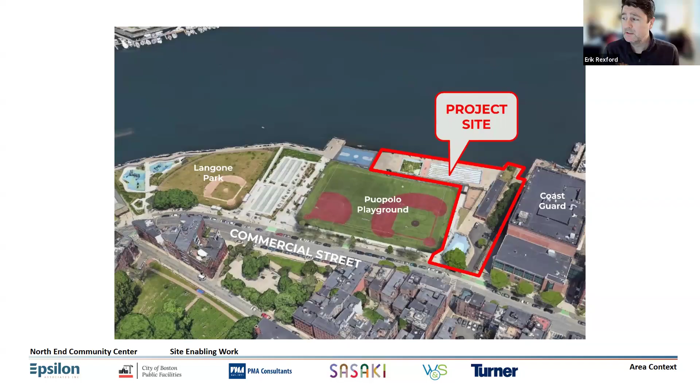But tonight, I want to go on with the limited scope of enabling work that was described in the notice of intent and has been modified by the supplemental information. Dee Dee, if you can jump to the next slide, that'd be helpful.

As described in the notice of intent, we're proposing a limited scope of work that includes demolition of the existing surface and subsurface structures—the pool, bathhouse, splash pad, and deck—cutting and capping of utilities, and geostructural improvements.

The initial notice of intent contemplated, as you mentioned, Chair Parker, elevating the seawall. We are no longer proposing to do that as part of this enabling work. That will be the subject of a separate notice of intent covering the full redevelopment project, including the North End Community Center, Harbor Walk, and the new pools, and so forth. For now, we're just seeking an order of conditions authorizing the demolition activities, cutting and capping utilities, and the geostructural improvements that I'll talk about in a couple of slides.

You can jump to the next slide, please. You mentioned resource areas at the top. All the resource areas and impacts are the same as described in the notice of intent, with one exception—land subject to tidal action.

I have a couple slides on this later, but we're proposing to install some H piles in land subject to tidal action. Those were not described initially in the notice of intent, but are described in the supplemental information submitted earlier this week. So the resource areas are coastal bank, buffer zone, waterfront area, land subject to coastal storm flowage, and land subject to tidal action.

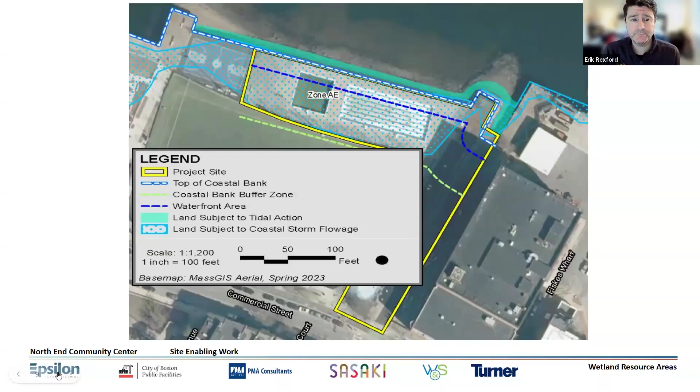Next slide, please. In addition to the demolition work and the utilities, there's a couple of buckets of geostructural work that will be conducted within the green shaded area. We did describe this all at the last hearing, by the way.

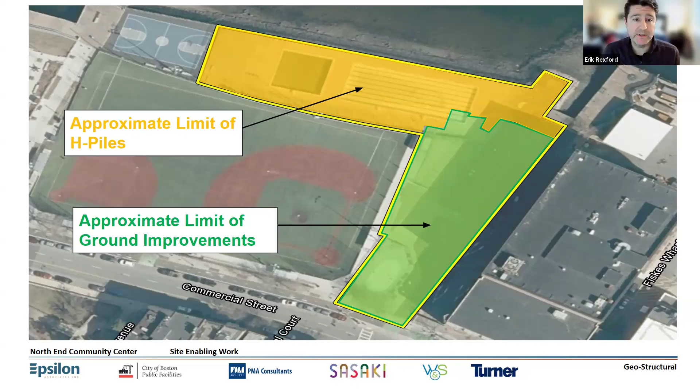Within the green shaded area, we're proposing to advance displacement columns. Those will support the vertical development under the additional notice of intent later this spring. Then there's the installation of a network of H piles that will support the pools, the future pools, pool deck, splash pad, and other structures within the yellow shaded area. Next slide, please.

This is a representative cut from the sheets included in the supplemental information showing the location of H piles at the northeast corner of the site. I selected this area because I want to call out the 16 piles at the bottom right of the site. This location is currently a wooden pile supported deck. As part of the demolition activities, that deck will be removed. Under the separate notice of intent, it will be replaced in the exact same location with a concrete deck. To support that concrete deck, we need these H piles.

We're proposing 16 H piles outboard of the top of Coastal Bank. This area underneath the deck is a granite block revetment, and we're proposing to install 12 H piles in land subject to tidal action. Four of those H piles will be installed above mean high water through the revetment and into Coastal Bank.

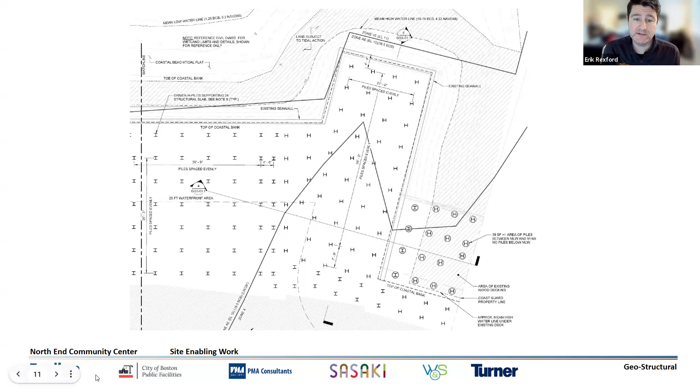Next slide, please—I think it's just a section of that same area. Yep, the three vertical piles on the right are representative of those 12 piles that will be installed in land subject to tidal action. The middle pile through the revetment is above mean high water and will go into coastal bank.

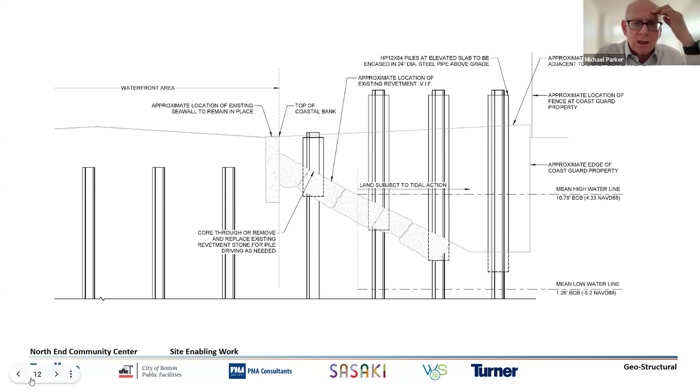Next slide, please. Just to clarify, you're proposing that work as part of the geostructural work? Correct.

There's a whole network of H piles that will be installed, most of them upland of the coastal bank. In this one location, where there's currently a wooden pile supported deck, we're proposing to install 16 piles through the revetment, but not yet install the concrete decking. That'll happen when the site is redeveloped, but we'd like to install these H piles now.

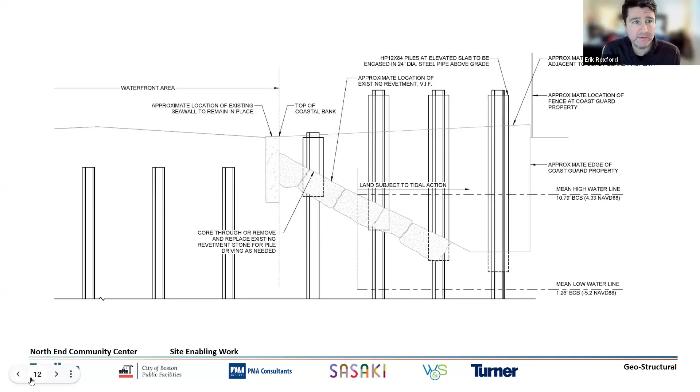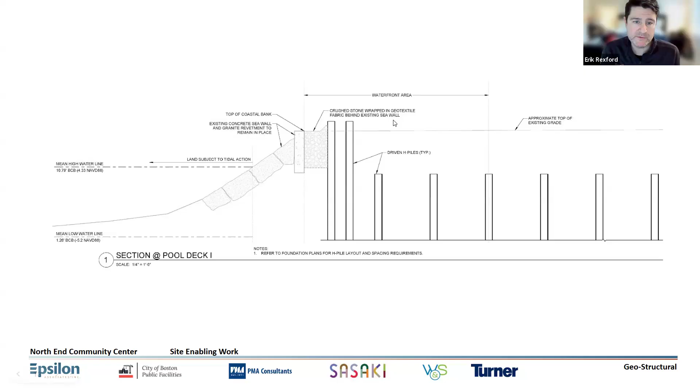Next slide is just through where the pool decks will be and are. Again, the seawall will not be touched—we're not proposing to elevate or alter that at this time. The pool forms will be demolished from the site, and that grid of H piles will be installed, all upland inboard of the coastal bank.

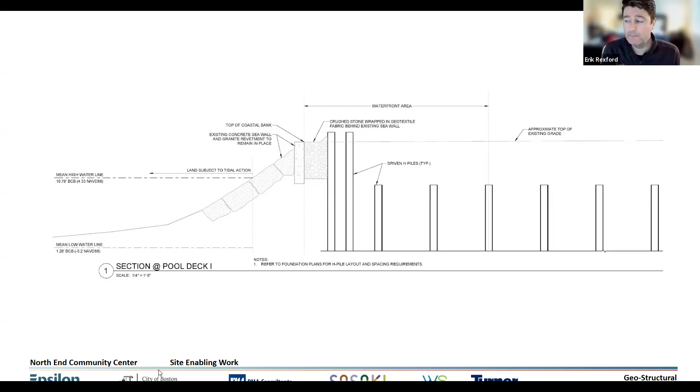Otherwise, all the work, resource area impacts, mitigation, and means and methodology as described in the notice of intent remain the same. With that, I'll turn it back over to the commission. Happy to answer any questions.

I have two questions. One, regarding the H piles shown a couple slides ago—what will they be supporting? You said concrete deck. Are they supporting the proposed harbor walk there, or what's their function going to be?

Yeah, so that concrete deck—maybe Steve Angler can help me—it'll be publicly accessible open space. There's also a splash pad that's going to be constructed back there, and I believe some of that splash pad creeps over the deck, but very little area. It's mostly just open space, publicly accessible.

I just want to make sure this isn't work subject to MEPA review that could change in the future, and that we're not jumping the gun here. It's certainly included in the project being reviewed by MEPA, but I have no expectation there'd be any alteration to that component, similar to the demolition of the bathhouse and the cutting and capping.

As far as the displacement columns—I might have forgotten this from last time—what's the process there? Is it like compressing soil and then putting in some sort of mixture to strengthen or solidify the ground? Is that how this is working?

I'm going to defer to the much smarter people on the team to answer that question. That's exactly my understanding, but Steve—I think Brett is on, and he's probably the best person to answer that question if you're available, Brett.

Great, thank you. So yes, we're back after the March hearing. I will give an overview of the project, but I won't go into as much detail as previously as to the purpose and intent. So if we go to the next slide - this parking lot project, the intent is really to create a resilient and more green parking lot that has safer bike routes and pedestrian routes and more efficient vehicle routing as well as wayfinding. And this is really the first implementable project coming out of the DCR Herter Park master plan project.

So the existing site, this is some context, but essentially we are within the resource areas related to the Charles River. To the left of us is the Artesani Playground and Splash Pad, and to the right is the moat, which also has existing wetland systems and resource areas associated with it.

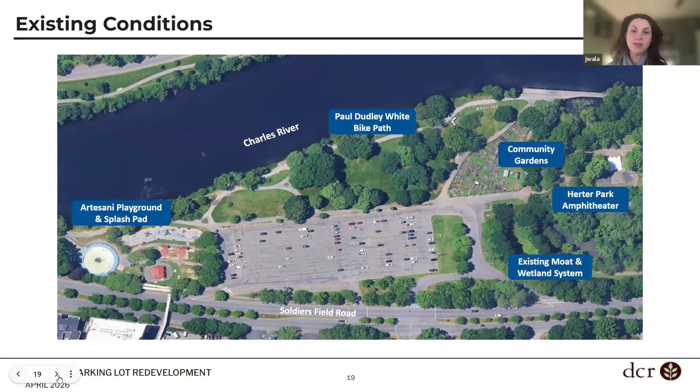We are looking at degraded pavement conditions and poor drainage due to an old drainage system. There are also accessibility issues, and as you can see with the aerial, no greenery within the bounds of the parking lot.

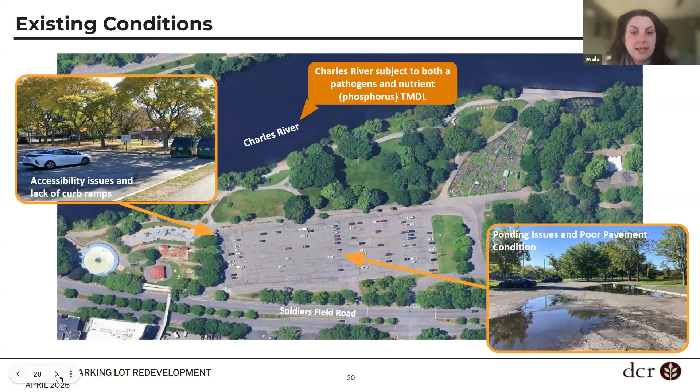We are proposing a new layout for the parking lot with new improved circulation that ties in and is coordinated with the Soldiers Field Road and Everett Street project. There's a lot more green space introduced, and we are also introducing bioretention basins and permeable pavers to treat stormwater for TSS and phosphorus. This project results in an overall decrease in impervious area as well.

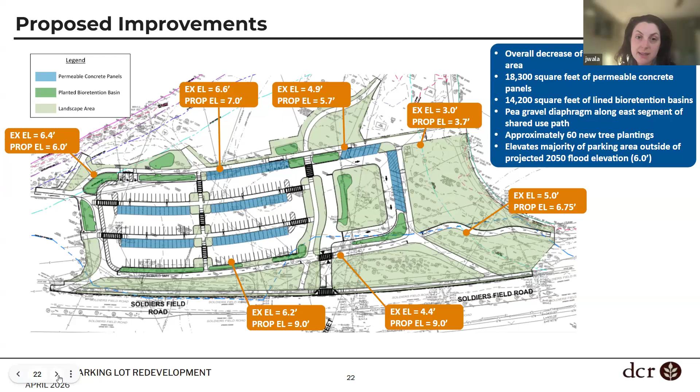We are raising the site as much as we can, given constraints with existing grades and surrounding properties in the community garden. Our goal was to set ourselves above elevation 5 to 6 based off of the MCFRM flood data. You can see we're hitting that 5 to 6 elevation or higher through the majority of the parking lot, but as we move towards the community garden, we become constrained by existing conditions. So we are raising the parking lot where we can for resilience purposes and to reduce flooding on the site.

This is a summary of the work we're doing in the resource areas. Looking at the 100-foot buffer to the bank, we are slightly increasing impervious area in this case, but all of that is proposed walkways, and the overall project has a reduction in impervious area and a reduction in peak runoff rates and volumes as a result.

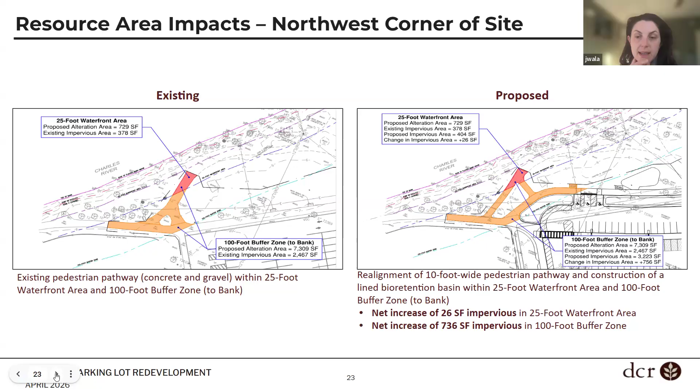Similarly, in the floodplain adjacent to the moat system, we are eliminating a paved walkway and replacing it with a permeable material. So here there's a reduction in the 100-foot buffer and the floodplain.

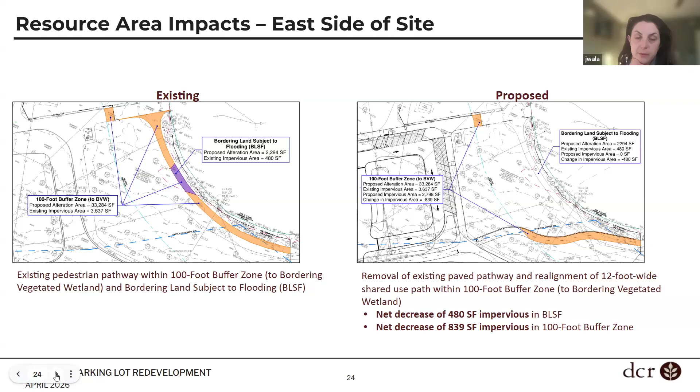At the last hearing, we discussed phosphorus removal and TSS calculations. We've been working with John Sullivan since to make sure we're all on the same page with the credit we're claiming for TSS and phosphorus reduction, and essentially the storage volumes provided by each BMP. This addresses all the Mass DEP stormwater standards, which we're meeting as a redevelopment and exceeding.

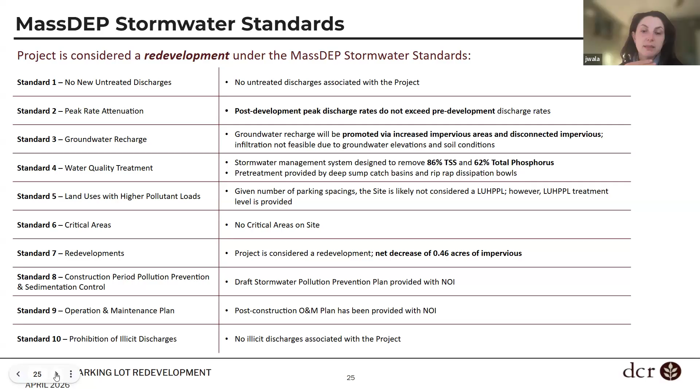This is backup that I've been providing to John Sullivan. I don't know if we want to get into the weeds on these, but essentially it shows the storage depth provided by each BMP and the phosphorus removal as a result.

Same with sediment removal, we're exceeding the 80% requirement.

I think a main discussion point from the last hearing is the maintenance of these systems. We had discussed manufacturer recommendations for the concrete panels, with vacuuming and sweeping happening 2 times a year. Since the last hearing, we went in and updated the operation and maintenance plan to include project-specific order of conditions that relate to the maintenance of the site.

So what we're seeing here highlights some important points regarding snow removal and any use of fertilizer, salt, and sand.

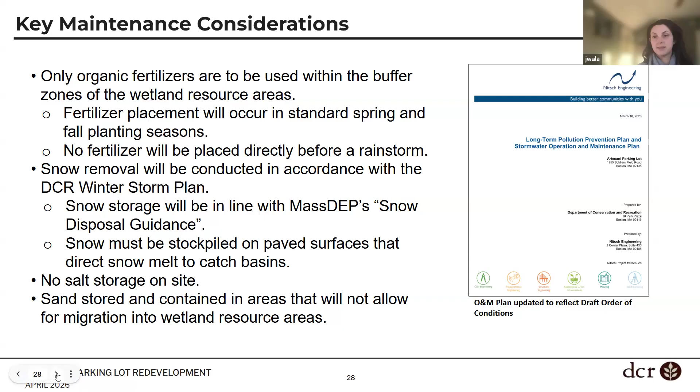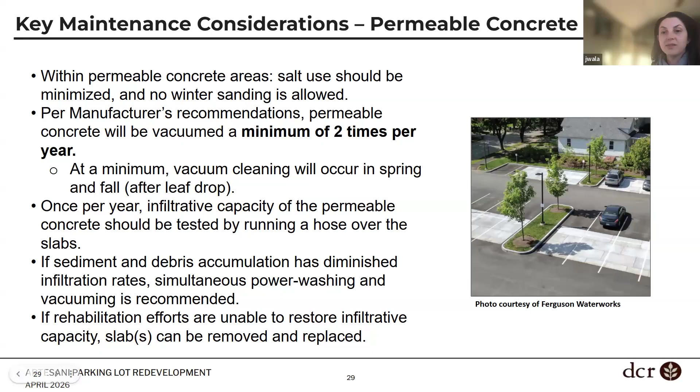If we go to the next slide, we're also distinguishing the maintenance schedule, talking about a minimum of 2 times a year coming in to vacuum the permeable concrete, and checking that the permeability is still effective at least once a year with infiltrative capacity testing. As we discussed last time, one of the benefits of these panels is that if there is a failure, they are modular and single ones can be removed.

Just to clarify, both of those slides, all of the measures in both of those slides are included in the O&M? Yes. Okay, thank you.

And with the bioretention basin, we had some questions on this one last time as well. But really, a majority of the maintenance happens at grade, and as needed, you'll start to need to replace the subgrade. But really coming in, treating the vegetation, removing essentially dead plants, replacing the mulch, just keeping the plants in good order and removing trash as it accumulates.

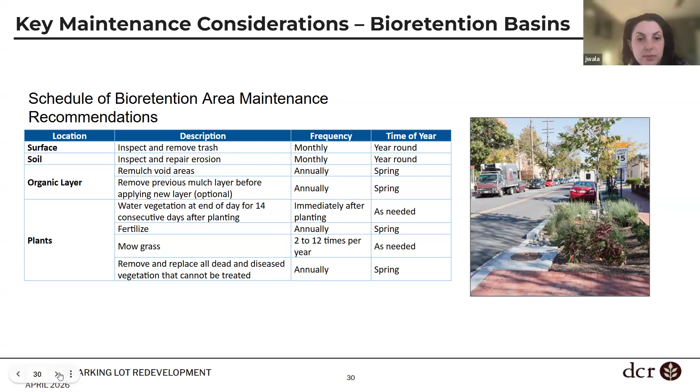I just have a couple quick ones here. Elena, this is actually for Elena. As far as the manufacturer's recommendations for maintenance of the panels, do we have that in the order of conditions? No, we don't have that, so that would be a good thing to add. Okay, so we'll need that submitted, and the revised O&M plan.

As far as one of your slides, Jess, talked about when debris accumulation affects infiltration values. How should I ask this question? I mean, when will you know that, or DCR know that a certain level of debris accumulation has occurred, or the debris accumulation won't occur because it's going to be maintained twice annually? I hope I asked that question in a way that made sense.

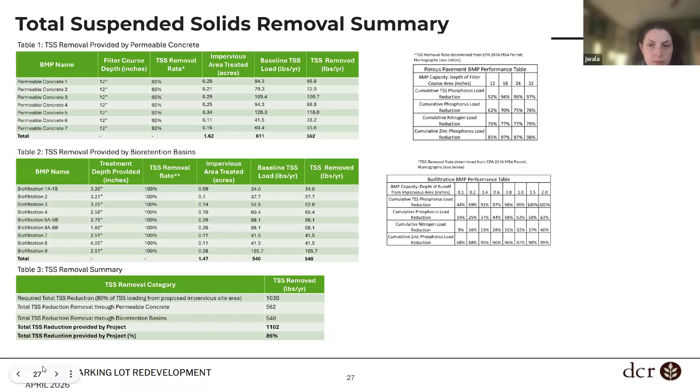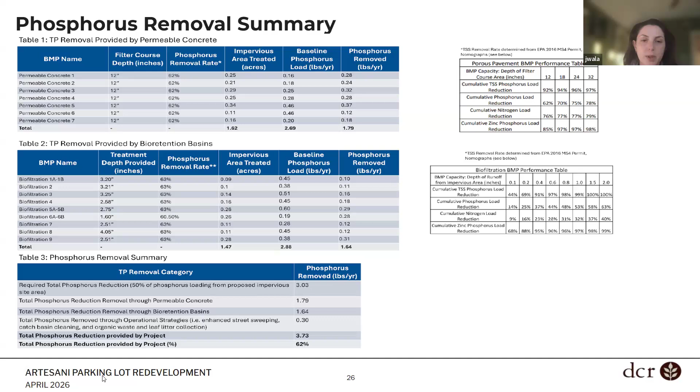If we go to slide 26. So the way this is calculated, this is a summary sheet we made for coordination with John Sullivan and for this presentation. We have more detailed calculations in the stormwater report, which may be what you're looking at. Essentially the total phosphorus reduction goal was 50% for redevelopment. In the bottom table, that 3.03 is based off the existing phosphorus loading from the site, which didn't make its way into this summary presentation.

And then the bioretention basins, as shown in table 2 above, those cumulatively are removing 1.64 pounds per year. Each bioretention basin has a certain volume of storage that it's providing. Based off that volume of storage, we correlate it to a rainfall depth and then use the MS4 guidance to figure out how much actual phosphorus is being removed based on the contributing impervious area, the rainfall depth provided, and the associated phosphorus removal rate. So that's how we got to that 1.64 pounds per year removed by the bioretention basins.

Similarly, with the permeable concrete, that is treating 1.62 acres of imperviousness and removing a corresponding 1.79 pounds per year. Those two together, plus the reduction in impervious area, plus operational strategies, get us above that 3.03 - we're removing 3.73 pounds per year of phosphorus, which corresponds to 62% phosphorus reduction compared to existing conditions. I don't know if that answered your question?

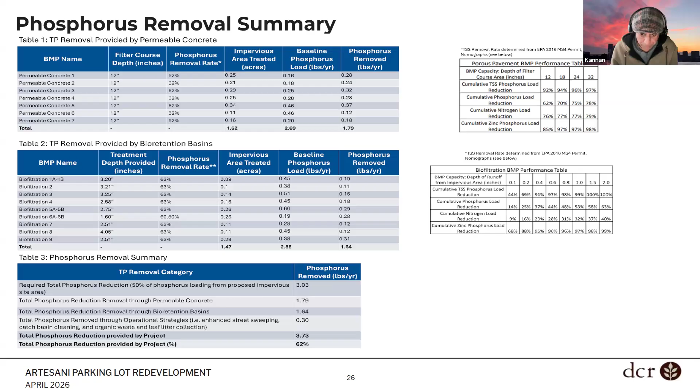Thanks for both of those responses. Oh sorry, now I understand your question better. Sorry about that, that makes sense. Sure, thank you. Commissioner Wilson, you had a follow-up?

You found some historical data here? Well, now that I'm deeply skeptical of the internet, no, I do vaguely remember this, but in like 2015, 2016 there was some sediment removal for Faneuil Brook, and the dewatering took place at Herter Park. That seems to have not occurred in basically recent memory.

The geotubes were there for the dewatering, given the large flat surface with good drainage. I was just wondering, is that a one-off, just wanted to double check whether there are alternative sites for that sort of thing, if this site is preferred for other reasons, or whether there are provisions in place for that type of activity to happen in the future.

I'm not familiar with that particular endeavor, but I can speak to the fact that this location, because of its condition, size, and large swath of pavement, has been a depository and probably used for a number of things in the past. With this project and this investment happening at this location, and the fact that we're almost using this as a model for a lot of things, trying out new innovative technologies and addressing our MS4 requirements, that kind of activity is just not going to happen at this location anyway.

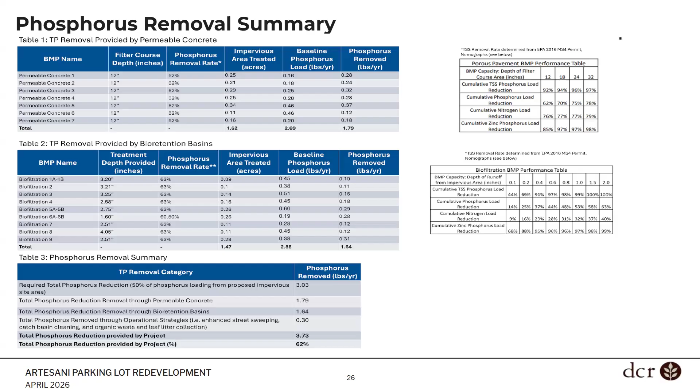Okay, thank you, cool, appreciate it. Thank you, guys. Commissioner Estes-Margiassi, thank you for being so patient, your turn. At this point, no additional questions between last time and this. Some good explanation of the removal, though, with all the additional questions.

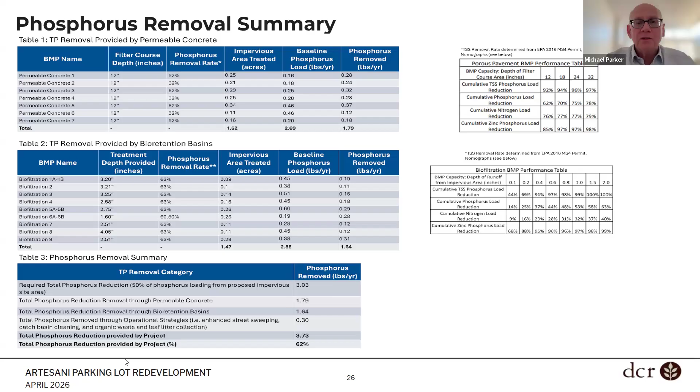Great, thank you. Okay Elena, I noticed a hand raised. Yes, I think was it Eva Webster?

Yes, hello, thank you. I am an Allston Brighton resident and I'm here for a different project, but I just had a glimpse of this one. And I wanted to clarify, this involves changing the configuration of the large parking lot near the river.

Yes. Okay, so this is just a general question, and I realize it may be coming too late in the game, but as someone who goes to places like Home Depot and Costco, I notice people always are looking for parking spaces that get some shade in summertime. And when it's really, really hot, it's just so regrettable not to be able to park your car close to some tree. I was wondering if the designers of DCR parking lots here or elsewhere could consider designing those parking lots so there would be some kind of a median between two rows of parked cars, so one tree could be between and help with the lack of shade in summertime.

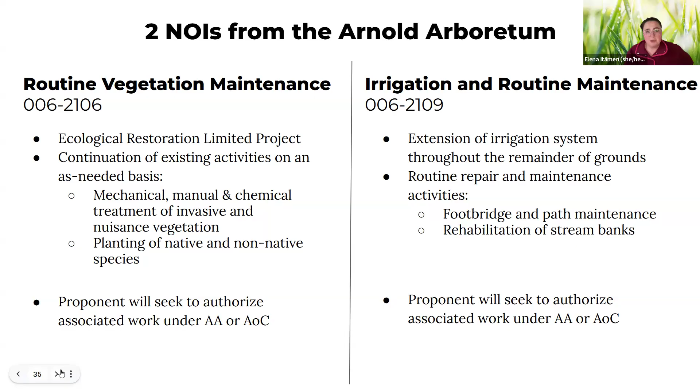We'll determine what the appropriate path forward is. The other note is that the project team understands that if the commission votes to issue an order of conditions, it won't be in perpetuity. They would request an extension as needed every 3 years. So those are just the administrative notes, but the idea is to have this in place so they're able to conduct the maintenance that the Arboretum needs. Okay, great, thank you, Elena.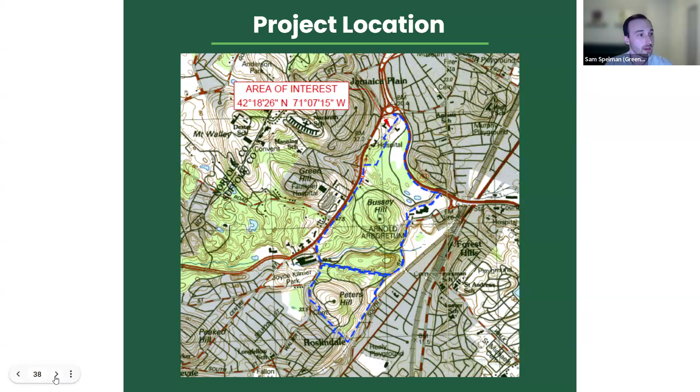As Danny mentioned, this particular filing is an Ecological Restoration Limited Project with the aim of improving wildlife habitat quality, water quality, groundwater recharge, and flood storage within the Arboretum property. It seeks to accomplish these objectives through various means, particularly vegetation management. They propose several activities as part of that plan: mechanical and manual removal of invasive and nuisance plant species; herbicide treatment to invasive and nuisance species where needed; and implementing intentional plantings of native and carefully selected non-native, non-invasive plant species to augment the existing collections and improve habitat quality in the park. Next slide please.

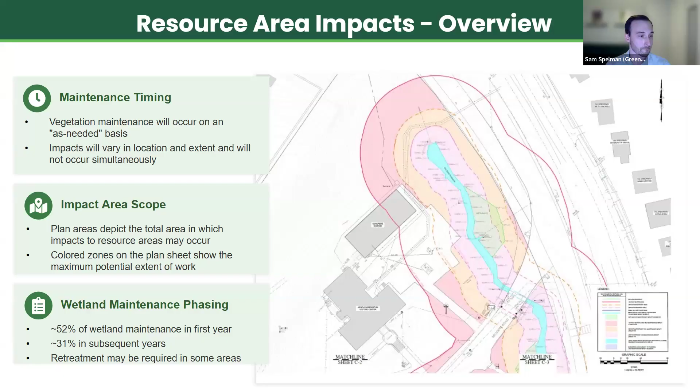We want to re-emphasize that this project does not propose any permanent impacts to wetland resource areas. All of the impacts proposed as part of the vegetation management will be temporary in nature, but the goal of these temporary impacts will be to improve the quality of the wetland resource areas on site, allowing them to perform their vital functions more efficiently, which in the long term will advance the interests of the Wetlands Protection Act.

With that, I think we'll hand it back to the Commission for questions.

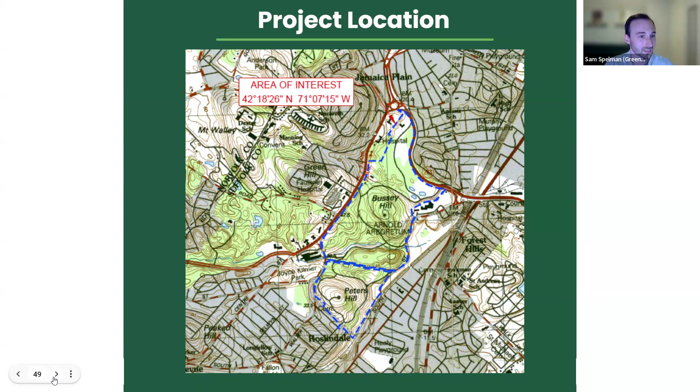So the proposed work as part of this filing includes a variety of maintenance activities that the Arboretum is proposing to maintain their existing infrastructure. That'll consist of gravel and mulch path maintenance, which qualifies as a limited project when it occurs in riverfront only. We also have wooden footbridge maintenance at several locations in the Arboretum. Another maintenance activity proposed is the rehabilitation of certain sections of the Bussey Brook stream bank. In addition to these maintenance activities, as Danny mentioned in his intro, the Arboretum is also seeking to extend their existing emergency irrigation network, which will provide coverage to the collections in times of drought, which the Arboretum believes are becoming much more frequent as a result of climate change. Next slide, please.

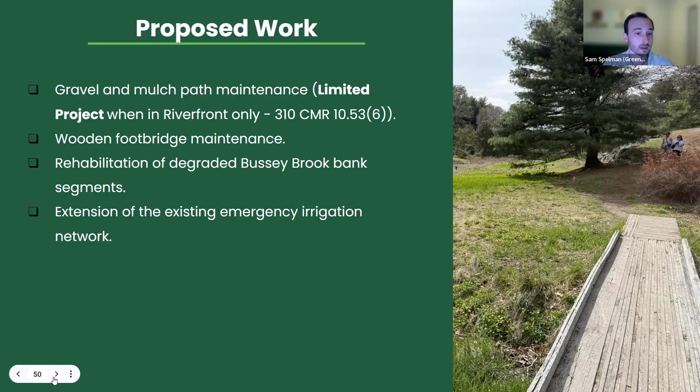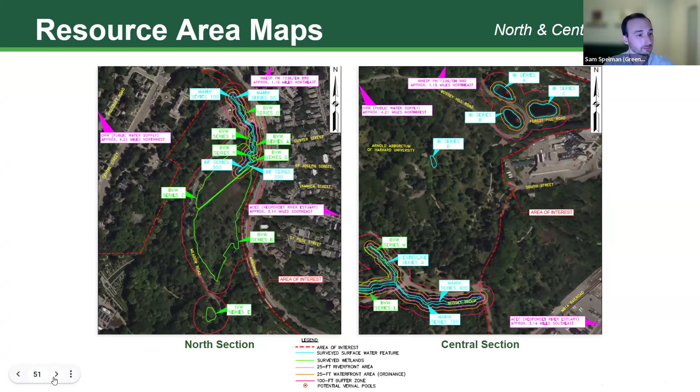We again have an overview of the resource areas that were identified on site. We can move forward. Next slide, please.

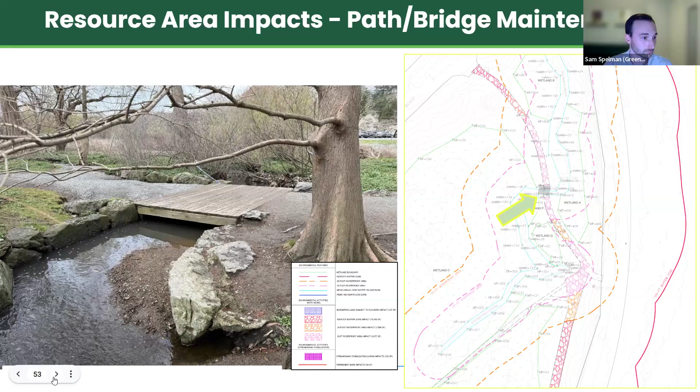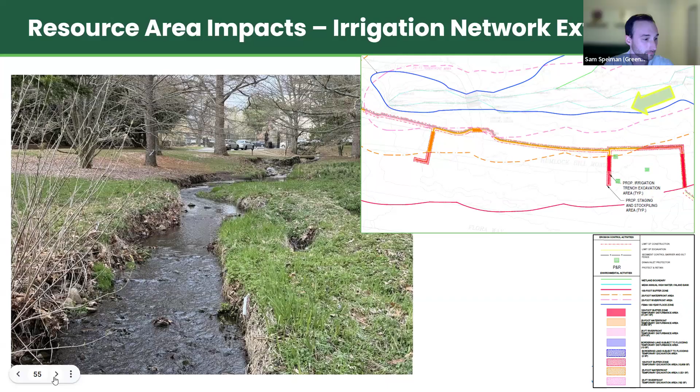Next slide, please. This slide shows another example of the location where the irrigation network will be installed in the grassed area just adjacent to the road.

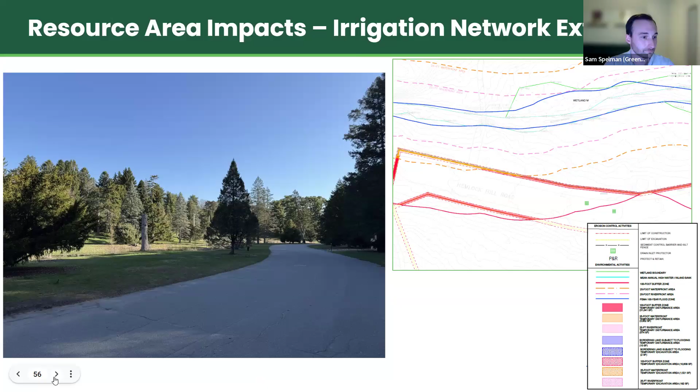Next slide, please. I want to highlight that out of all the activities proposed by this project, the only one resulting in minor permanent impacts will be the boulder replacement to stabilize the banks in Bussey Brook. All of the other impacts proposed by this project will be temporary in nature.

Next slide, please. We want to highlight that the Arboretum is going to utilize best management practices when performing these activities, and also when installing the irrigation network, to make sure that disturbances to wetland resource areas are limited to the greatest extent possible.

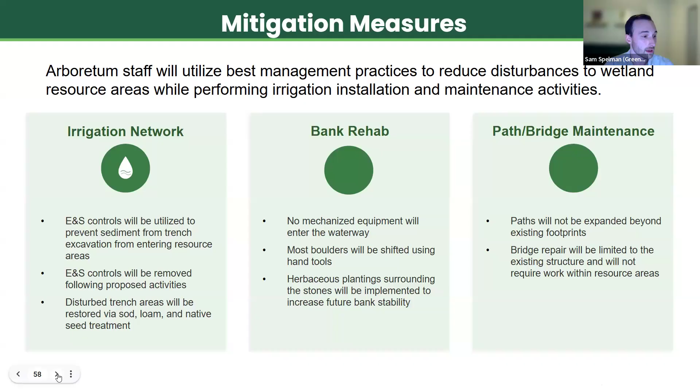Yeah, I think that's all we have here. Next slide, please. And we'll go to the commission for questions.

Thank you, Sam. So I know the answer to this question isn't that you're going to be picking up the boulders and moving them yourself. I expected that there'd be machinery doing that, but I see in your last slide that hand tools are being used. What sort of hand tool moves a boulder? Could you go into the process of how that's accomplished? Either a crowbar, depending on the size of the boulder, or some kind of tripod system with a pulley and a winch.

Maybe I'll leave the follow-up question to Commissioner Wilson. I'm not sure I understand what the impacts would be. Okay, that's all I had.

Elena, what do you have on this? Yes, I didn't have anything else beyond what we mentioned at the top, and I failed to mention earlier that we have some photos from our site visit, which we conducted last week. Great, how long did you stay out there? The site visit lasted like 3 hours. We were out there for a bit. Thankfully the Arboretum had arranged for us to be in a van, it was pretty chilly on Thursday, so we were thankful for that. We spent some time out there, and it was really great to see all of the potential project sites, and also got to see more of the Arboretum, which is always great. That's great, the lungs of the city. Truly.

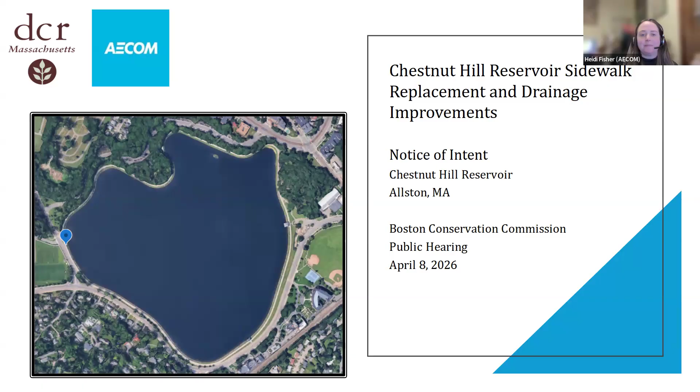The scope of work for this project includes the repair of the existing pedestrian pathway, as well as restoration of the existing stone dust path. This will be roughly in the existing alignment, about 2,100 linear feet of the existing trail going around the reservoir. The improvement of the pedestrian pathway will result in a small decrease in impervious surface, so there will be a smaller footprint, and areas that will not have new impervious surface will have grass restoration. Along the trailway there are various benches, and the plan is to remove the concrete pads that are in deteriorated state and replace those in situ.

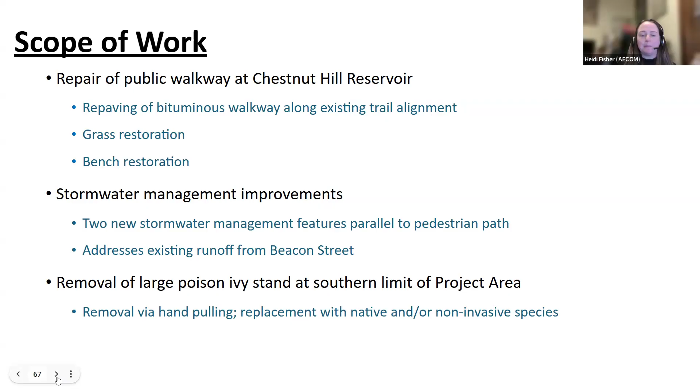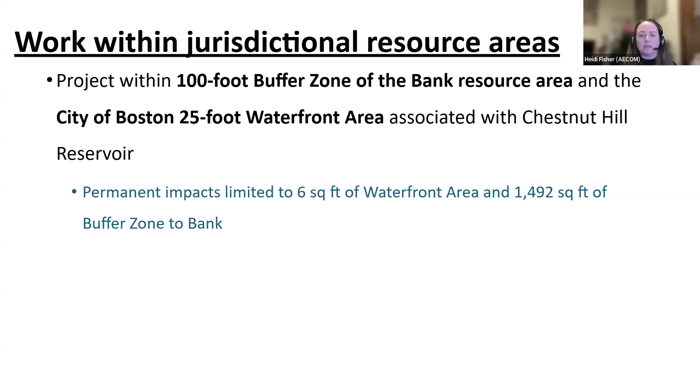The resource areas that coincide with the limits of this work include the 100-foot buffer zone to the bank resource area associated with Chestnut Hill Reservoir, as well as the 25-foot waterfront area. The majority of this work will be mostly related to temporary impacts associated with the installation of soil and erosion controls and temporary work associated with paving. The permanent impacts will constitute a very small portion of the overall work, with impacts to the waterfront area and the buffer zone.

We wanted to provide a plan view with an overall idea of where these features will be in relation to the Chestnut Hill Reservoir Trail. We're a little zoomed out here, but to give an overall idea, the yellow hatched area includes both the new bioretention swale and the work for restoration of the sidewalk and stone dust path. The green hatched area encompasses the bioretention rain garden.

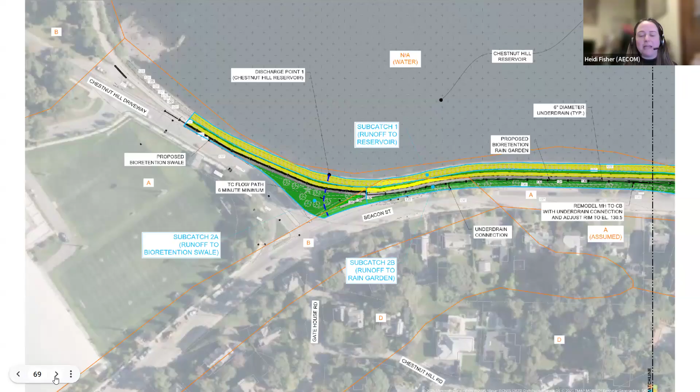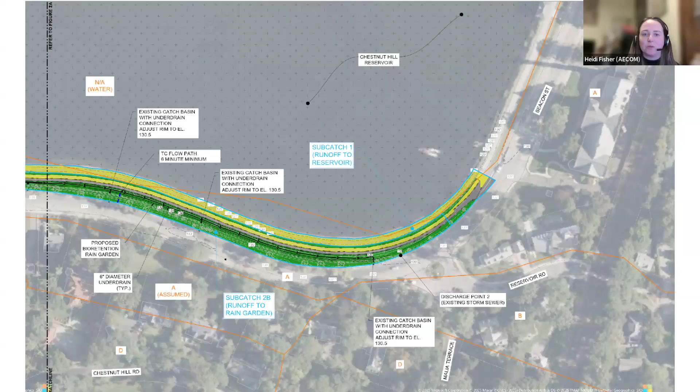This is the beginning of the project area, and this will be the southern limit of the project area. The restoration of the stone dust path and sidewalk will carry down, and the rain garden will carry down as well, with the patch of poison ivy located towards the end there.

Again, we're a little zoomed out here, but just wanted to give an overall plan view. The top image is the beginning of the project work with the bioretention swale, in that linear feature you see there. The image on the bottom is the limit of where the bioretention swale ends and the beginning of where the rain garden begins, at the intersection of Beacon Street and Gate House Road. They don't overlap there—it's where one starts and the next begins, carrying it down the rest of the way.

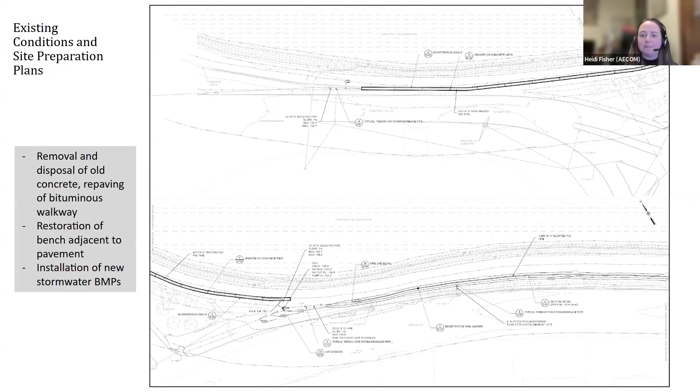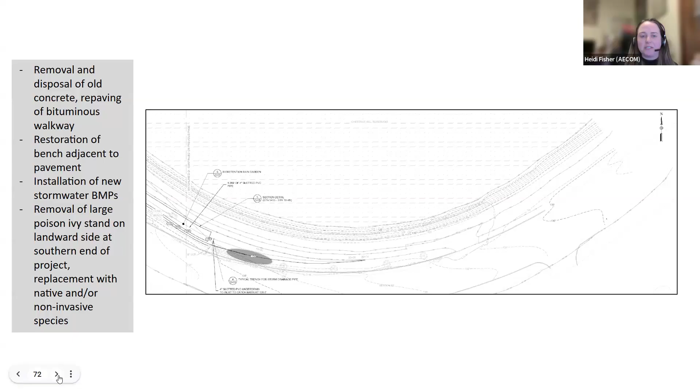And that large oval feature there, that's just where the poison ivy is. So that's the end of the project area there. And then we can go ahead and go to the next image, because it'll give a section view to

You can see on the left-hand side we have Beacon Street, and then we show the grading, which will be approximately 2 to 1 to come from Beacon Street down to where the stormwater features will be. And so where the rain garden is going to be, it's going to be located between Beacon Street and the sidewalk, where it's currently a grassy area.

And then the bioretention swale, which is located in the northern part of the project limits, that will actually be located between the reservoir and the walking path. Next slide.

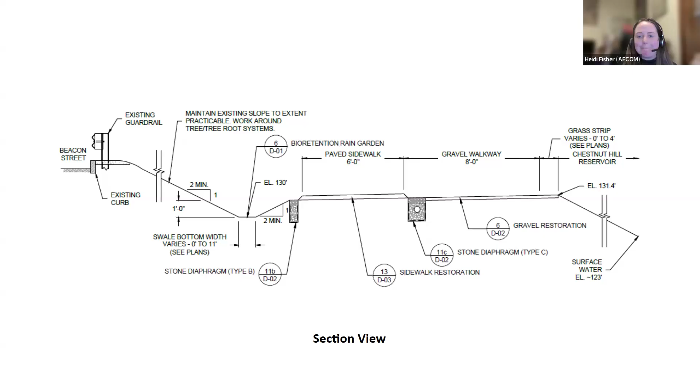And we just want to provide an additional section view to give an idea of what the detail here will be. And that's all I have, so happy to answer any questions.

Thank you, Heidi. First off, could you just quickly go through the erosion controls proximate to the sidewalk there? I know it's pretty tight quarters with the reservoir.

What's the plan there? I believe that there will be fencing put into place around the project limits. Erosion controls are going to be at the toe of the slope, but just around the edge of the reservoir itself, and then turning in on each end at the terminus of the project, with fencing controlling the rest of the site where pedestrians and people would be walking. But actual erosion controls will be at the toe of the slope before it goes down into the reservoir.

Okay, thank you, Tom. So the other question I have here, Heidi, is the difference between the swale and the garden. My understanding for bioretention swales was there was some sort of treatment, and the difference, and I might be wrong here, with a garden was more infiltration. But as I'm looking at the slides, both features seem to infiltrate and then release somewhere on the subsurface, I believe.

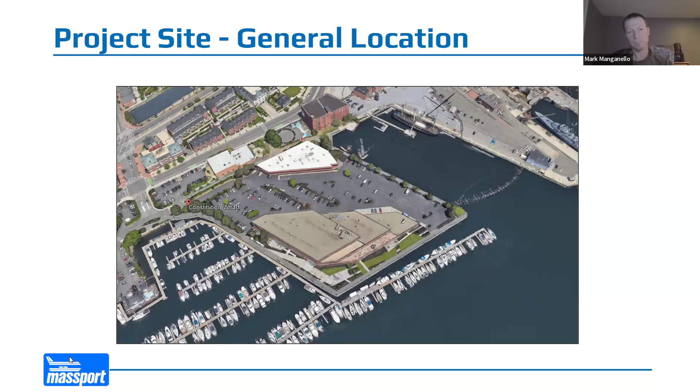Next slide, please. These are some photos of the existing conditions in the project area. So this is the west side of the wharf where you can see the harbor walk and some landscape planting beds, and the marina on the ocean side. Next slide, please.

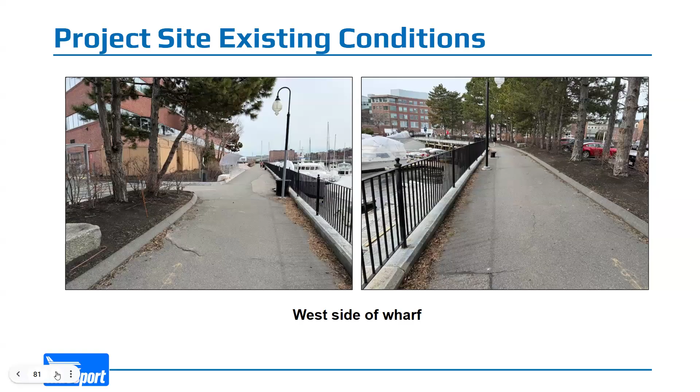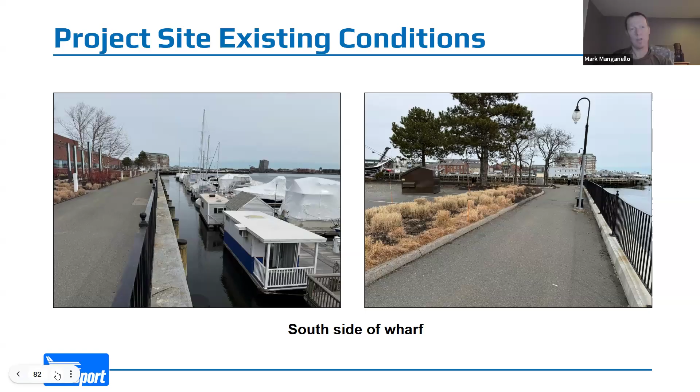And then turning the corner, the south-facing side of the wharf, the marina wraps around here as well. Similar conditions, the harbor walk extending along the top of the bulkhead and some landscape plantings on the landward side of that. And next slide.

And then turning the corner facing east, you can actually see the Constitution there in the background in the photo on the left. The harbor walk continues down and turns to the right briefly to Paul Revere Park, where one of the land borings is proposed. Next slide.

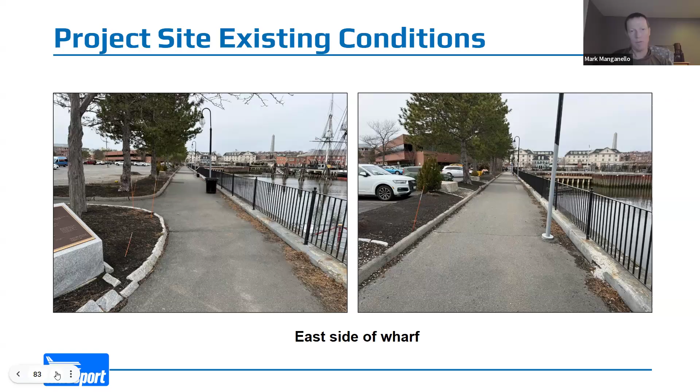So as Chris mentioned, this is to support design of a future bulkhead rehabilitation project, which will come before you through a separate notice of intent.

The land borings, water borings, and two geoprobes are all 6-inch diameter probes and borings. The land borings will go to 80 feet or bedrock, water borings 30 feet or refusal, and the two probes 12 feet or refusal. The one test pit is approximately 14 feet by 8 feet in area, and they're aiming for a depth of 17 feet there.

The land borings, probes, and test pit are all in land subject to coastal storm flowage and coastal bank, or buffer zone to coastal bank impacts, totaling approximately 116.5 square feet. The water borings are in land under the ocean and land containing shellfish, totaling 2.5 square feet. All these disturbances are temporary and will be restored after the activity occurs.

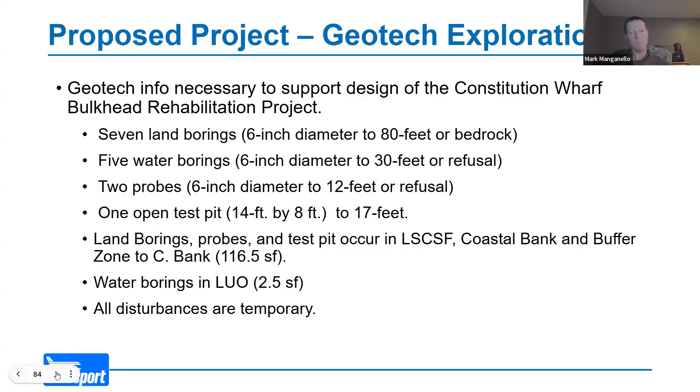Access to the harbor walk will be maintained as much as possible during the land boring and test pit work, though temporary detours may be necessary. The contractor will also be required to prepare a dewatering plan and hazardous materials plan, which would be implemented if necessary.

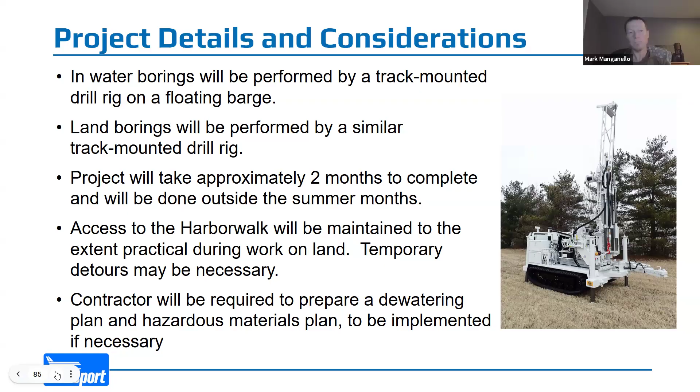Next slide—well, that's the last slide. So that's an overview of the project. Dan Kennedy from GEI Consultants, the project engineer, is also here. If you have any technical questions about the geotechnical work, he can probably answer those better than me.

Great, thank you, Mark. Okay, a couple quick questions here. On the barge, I assume you have a spill management plan and spill containment measures that can be submitted to the commission? Yes, we do.

Okay, perfect. Land borings—do you really expect to go down to 80 feet there? Yeah, so for as long as, if we hit bedrock sooner, we'll stop there. We're planning to drill 10 feet into the bedrock, but if we don't, we're going to go down to 80.

Okay, interesting. As far as the dewatering, Mark talked about the potential that there might be contaminated sediment or soils. How would you know that you've hit it and that you should manage those soils?

So we don't anticipate that we're going to hit contaminated soils. The only area where we're excavating soil is at the test pit area. There, we would excavate the material, stockpile it with erosion control measures, and that material is planned to go back into the same test pit.

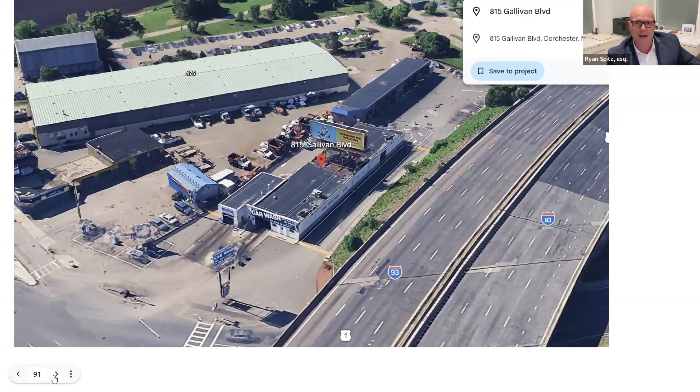If we can go to the next slide, please. Project overview: the scope is very simple. We're removing the old sign using a small mobile crane, then installing a new comparable sign in the same location, same dimensions, with a single column rather than the two columns of the existing sign. The key detail here is the installation method—we'll vibrate the new column to engineered depth. There's no concrete pour, no soil displacement, no grading. We're putting back what was there, but safer and built to current structural standards.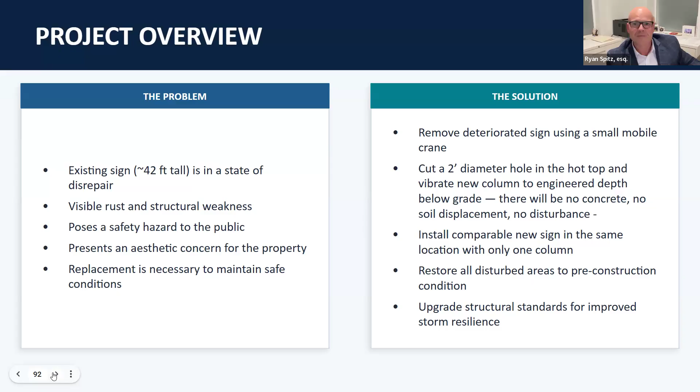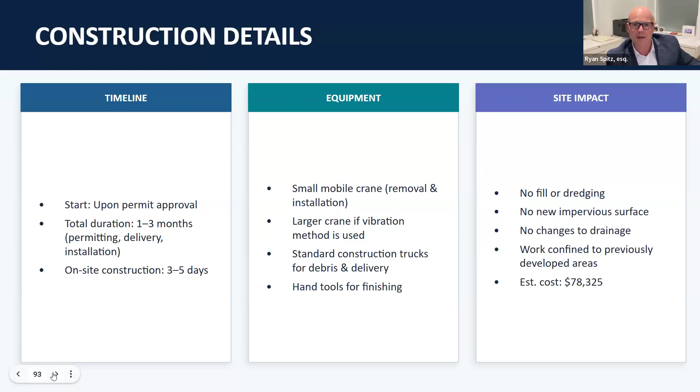Next slide, please. On the logistics side, permitting and delivery will take approximately 1 to 3 months, but actual on-site construction is just 3 to 5 days. Equipment is modest: a mobile crane, standard trucks, hand tools. Critically, there are no changes to the drainage, no new impervious surface, and all work is confined to the already developed area. This is a low-contained, low-impact project. Next slide, please.

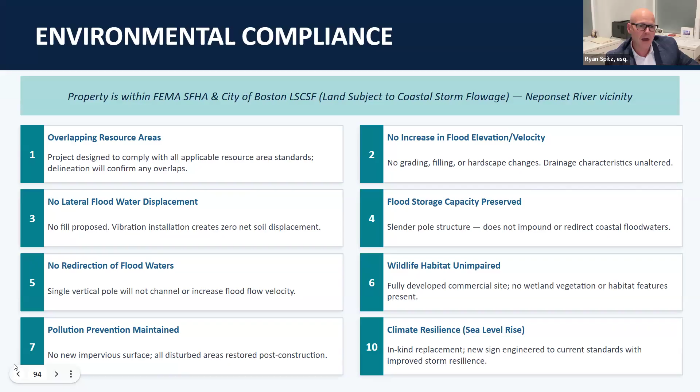Now, the site is within FEMA's special flood hazard area and the City of Boston's land subject to coastal storm flowage, the Neponset River vicinity, approximately 500 feet away. So we took environmental compliance seriously. The project satisfies all 10 LSCSF performance standards. No fill, no grading, no hardscape changes. Drainage characteristics are completely unaltered. The vibration method means zero net soil displacement, so there's no lateral flood water displacement and no reduction in flood storage capacity. The slender pole won't redirect or impound flood waters, and the new sign is actually engineered to improve storm resilience standards, which is a climate resilience grade upgrade over what's there now. Next slide, please.

To sum it up, this is an in-kind replacement that improves safety, satisfies all wetlands and flood performance standards, and leaves the site in the same or better condition than we found it. So at this point, Mr. Chair, I'll turn it over to you for any questions or comments from the commissioners.

Okay, thank you, Counselor. That was very succinct and straight to the point. I think the only issue that brought this before us is that you'll be going 40 feet into the ground for support—I assume that's a function of the height of the sign. I have Xander Oram here from the engineers, as well as Greg Ziomek, and I think they can comment a little better than I could on that, pertaining to the depth. Okay, thank you.

Xander or Greg? I'd offer Greg to comment on that. I'm not really a structural engineer, I'm more of a site design engineer. This is Greg Ziomek with Ultralume Services.

The depth is needed because there's no concrete, nothing else except skin friction, so it has to go negative 36 feet below grade to get enough skin friction to uphold the wind loads and current engineering design needed so the sign doesn't spin, twist, sink, or fall over.

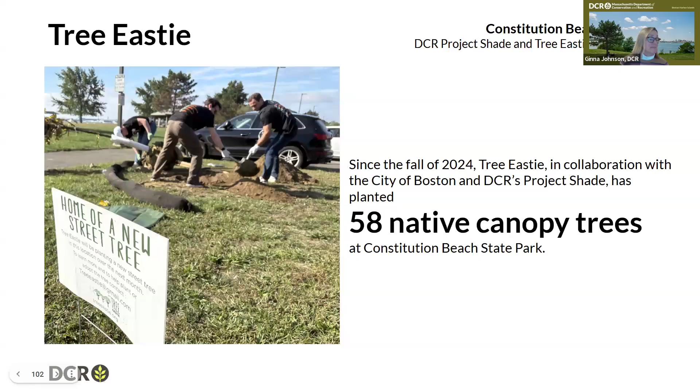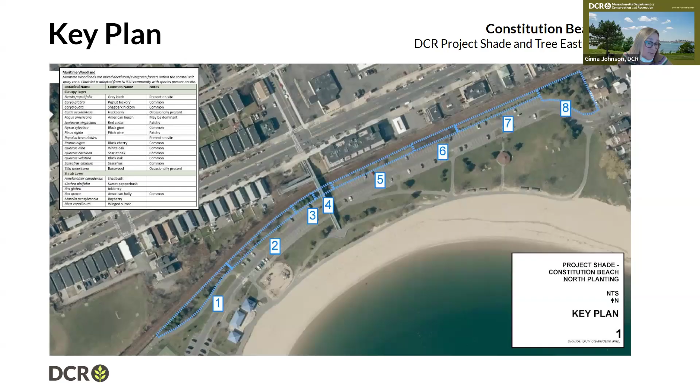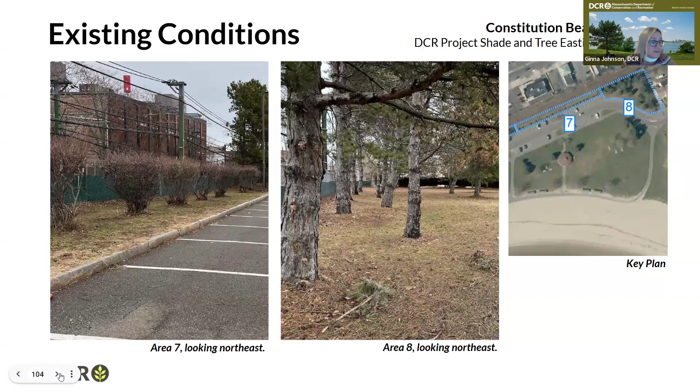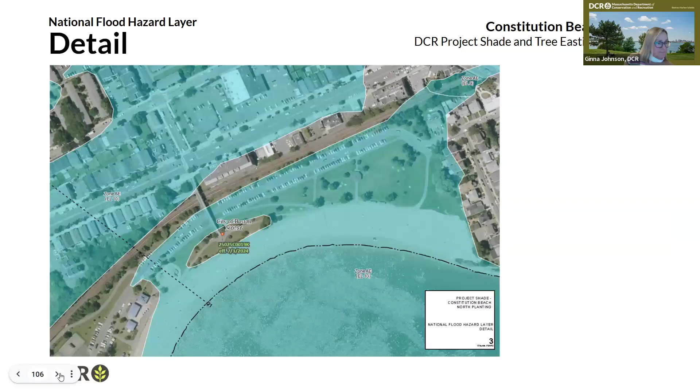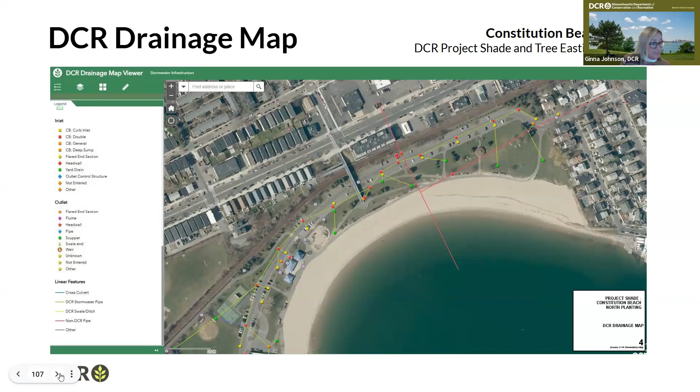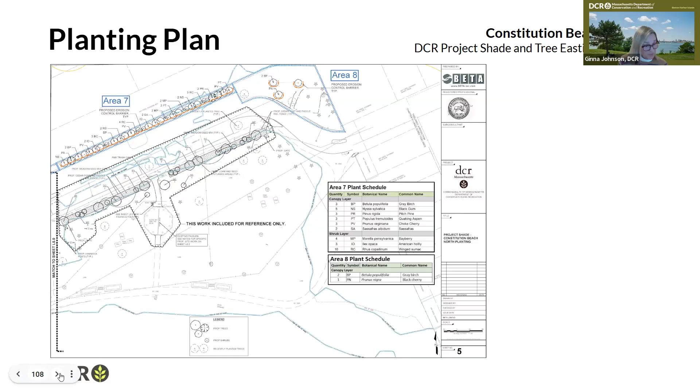And finally, the planting plan illustrates a naturalistic planting pattern for native trees and shrubs, as well as the placement of erosion control. Again, the back of curb will be maintained as a 6-foot mow strip, and the fence line with a 4-foot mow strip to prevent invasive volunteers growing into the fence. Next slide, please. Thank you, and we are happy to take any questions.

Okay, thank you, appreciate that. Quick question: the way you were presenting this, it almost felt like it was an RDA or an NOI as opposed to an amendment. So, are the trees being planted within the footprint of the original order of conditions or the original project, or are they outside? Chair Parker, this is an additional limit of work.

Oh, okay, so not within the original order of conditions. If the executive director or Ms. Hernandez would go back to the planting plan — I can see the relationship of the original limit of work. Okay. So, Elena, haven't we run into problems with DEP before regarding amendments that call for new alterations outside of what we've already approved?

We met with the project team before making a recommendation on how they would proceed with their filing. Given that this is strictly within LSCSF and not in a resource area with performance standards under state regulations—only local regulations—and given the nature of the work, the addition of trees, removal of some existing shrubs but replacing them with trees, and the specific location being so far from the water, all of those elements aligned with what was originally permitted, making it appropriate for an amendment.

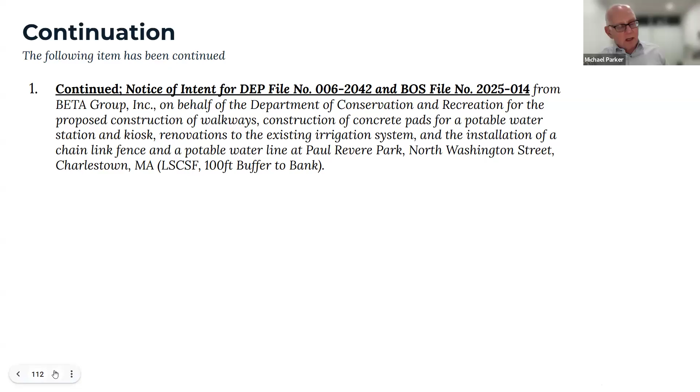First item on the agenda are requests for certificates of compliance. Elena, are these all ready to go? Let's see, from your perspective? Yes, so all of these are ready to go.

They do all have perpetual maintenance conditions attached to them, which are noted. Okay, thank you. Oh, I'm sorry, I thought you were finished. Okay, so I'm gonna propose something.

Unless any commissioners have any questions on this, I am proposing that we approve or issue these certificates of compliance en masse after I call them out with staff, instituting the perpetual maintenance conditions as they see fit. Does anybody have any objection to that, or would you like to stay here until 9:30?

It's the way I phrase the question. No objection. Okay, so with that, I would request a motion to issue a certificate of compliance for DEP file number 006-1909, certificate of compliance for DEP file number 006-1913 and Boston file number 2022-058, DEP file number 006-2084, DEP file number 006-2001 and Boston file number 2024-024, and DEP file number 006-2066 and Boston file number 2025-031, with all perpetual maintenance conditions that staff recommends.

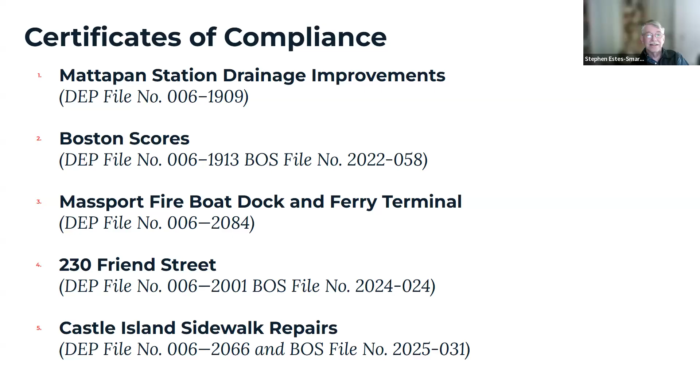Of course, you've done a lot of work here. Yes, okay. I also want to shout out Dee Dee for figuring out all of the scheduling with the snow. We had to stagger them a little bit more than usual. Fantastic, thank you, Dee Dee.

Okay, next item on the agenda, administrative updates. What do you have? Yes, so following suit, trying to keep this short, the administrative updates are really all just kind of FYIs for the commission. One of them is related to an order of conditions that was issued to Mass Audubon.

It was the Boston Nature Center end of year report for 2025. That is there for your review. If any commissioners have questions, please email them to me and I can share them with the project team.

The next admin update is just a notice that the spring cleanups NepRWA organizes annually are being scheduled. A lot of the volunteer slots are filled up, but there's a link in the email we PDF'd to their sign up. Those will be happening on Saturday, April 25th. A lot of great sites, a lot of familiar ones.

The last admin update is related to the continued remediation work the EPA is doing in the Neponset. They are holding a public meeting on what they've found so far, on April 21st at 6 p.m. There's also a fact sheet in the drive summarizing what they've found so far. Just wanted to make you aware of that.

Okay, thank you. Any questions from anyone? So we already know what they found, they're just going to be answering questions at the meeting? I think so. My experience with the updates they send out is that because of how technical they are, those meetings are an opportunity for them to explain things in more approachable terms. The materials they put out are helpful, but they can be quite dense. So I think this is an opportunity for people to understand more about the findings and then potentially ask follow-up questions.